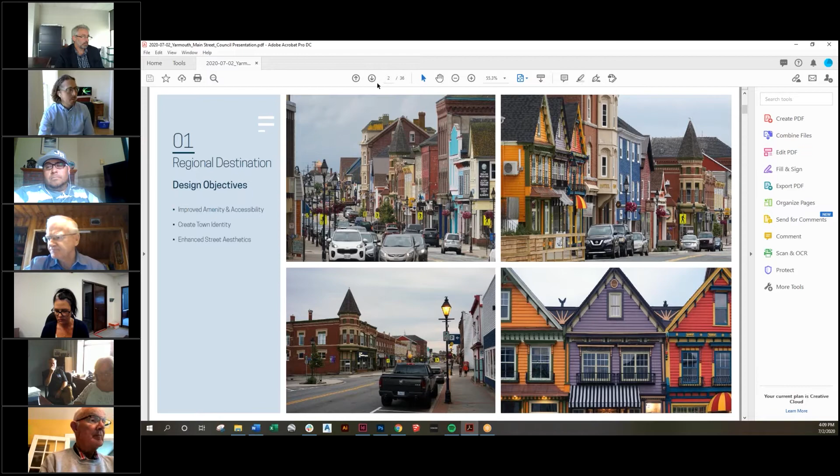To date, the streetscaping improvements started with phase one, Hawthorne Street, which converted it from a service street to a full street with sidewalk lighting, planting beds, and interlocking pavers. This work has really complemented the farmers market and created more outdoor space for vendors.

Phase two is the work our studio completed in 2017. This was a series of nine sidewalk extensions along Main Street and the adjacent corners, creating more public space in the street realm, allowing people to sit and rest, giving people planting areas and street trees, bicycle parking, and some stone features.

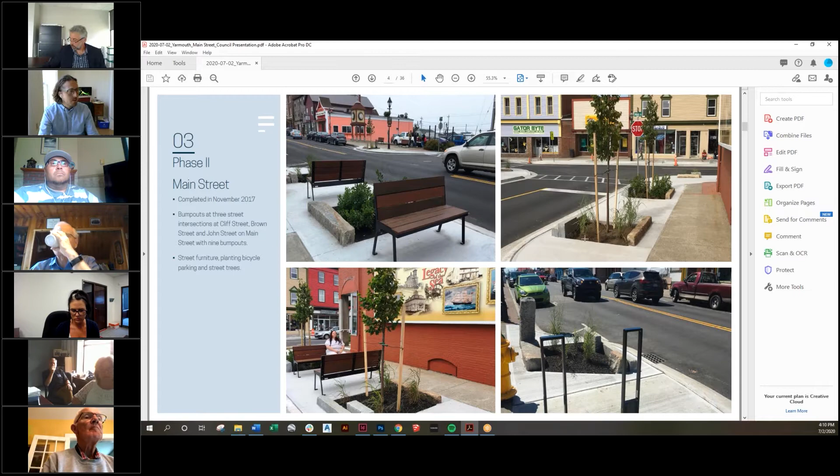So this is the phase of work we're in now, phase two extension. We're carrying the work down Main Street, past the AGNS and Alma Square, with our last bump-out area at Lovett and Collins Street.

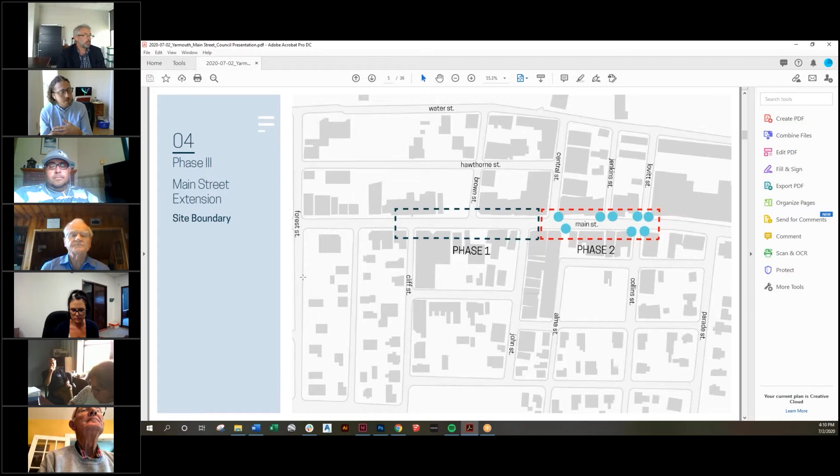As I mentioned, we were hoping, before COVID hit, to come down to Yarmouth and run a large public meeting to meet a lot of you folks, as well as residents. Lots of handshakes and greetings were in the cards, but that phase of life is over for right now, so we managed to move everything online.

We got some really great feedback. A lot of people at least looked at the site, watched the introduction video, and engaged with the survey. We wanted to get people's feelings about the work done to date, and that gave us a baseline for what to focus on in the next phase of work.

The three big takeaways were public art, more waste receptacles, and improved accessibility, meaning making sure the street was easy to use for people of all ages and abilities.

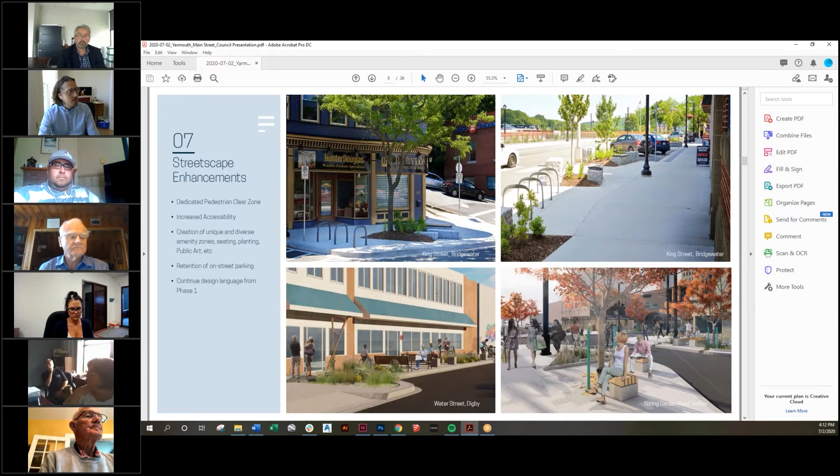One of the key things we are planning to implement for this phase of work is the use of plant material to mitigate stormwater. In our industry, we call it bioretention, meaning that rainwater that falls during a large storm is kept on site and doesn't overburden the underground pipe system. We use planting and soil media to absorb water locally and diminish the impact on the underground water system. One of the things we heard internally when we were bidding on the project was that...

Town of Yarmouth is really interested in utilizing technologies and streetscaping to showcase how progressive a group you are. This is, in our humble opinion, one of the best ways to utilize advancements in public realm design to use ecological services to really provide benefit to the city.

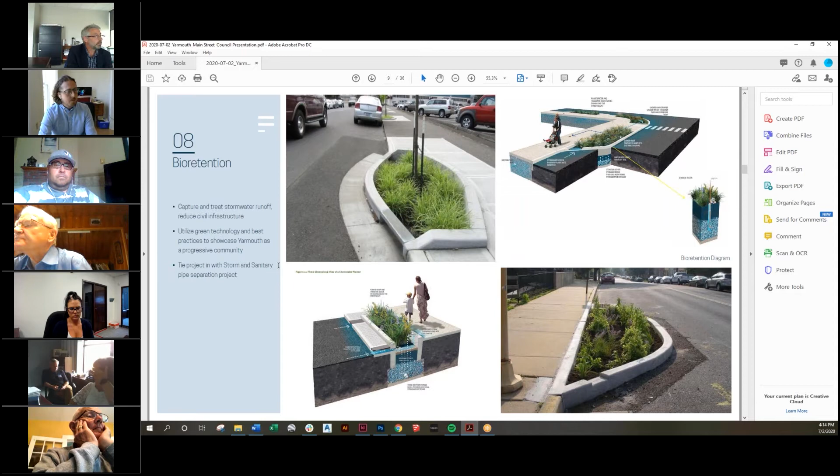Here's a little snapshot of what I'm going to walk you through now. We've really grown an interesting concept around this new streetscape phase, knowing we learned a lot in the last work we did, and we wanted to improve upon it. So I'm going to walk you through it now.

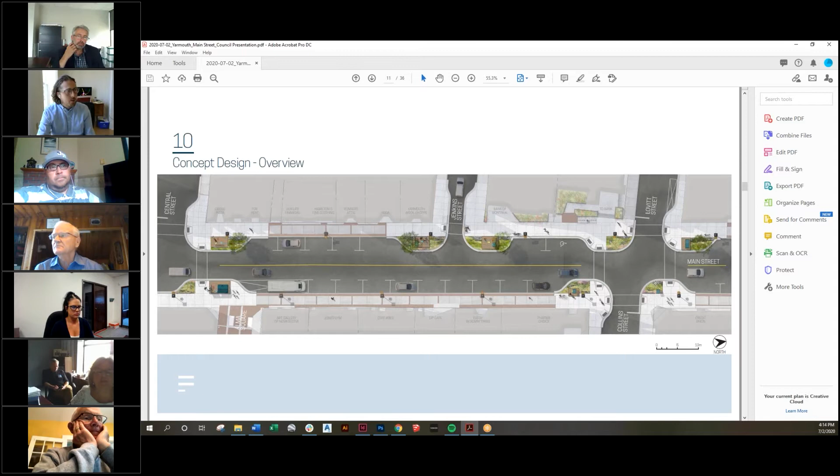We have an overview of the street from our limit of work, starting at Central Street and terminating just past Collins and Lovett. After we did the technical design for the street, these were the areas we identified could support sidewalk extensions while still retaining street parking, without causing too many conflicts for traffic movement and traffic flow in the area.

So we're going to just zoom into each area and quickly walk up the street. Right at the beginning, which is the piece that ties the work we did prior into this new work, the Central Street intersection, we have a sidewalk extension at Alma Square, which relates quite strongly to the Art Gallery of Nova Scotia, as well as acting as a transit amenity, giving people a place to wait for the bus.

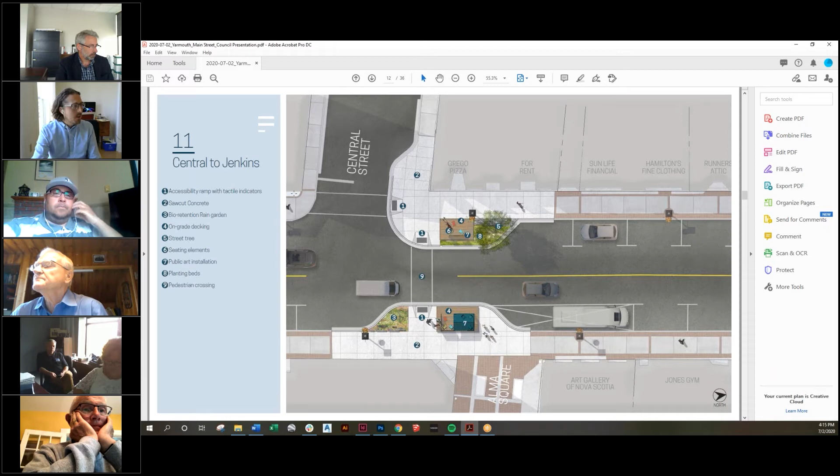I've got labels here, which you have from the presentation before. I won't go through them in great detail, but it just indicates what it is you're looking at from above, a bird's eye view, because sometimes it can be confusing.

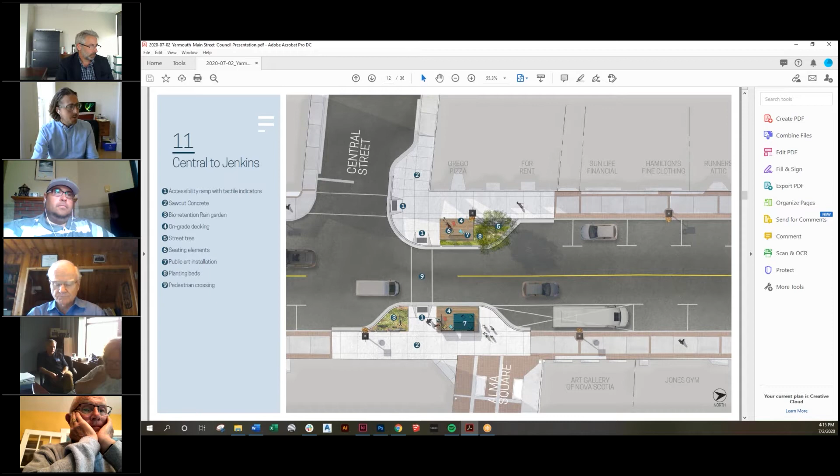As we move forward down the street, we are seeing these amenity spaces have a rhythm as we move down the street. We're taking advantage of every opportunity we can to increase plant diversity in the street, as well as to create spaces for people to linger and spend time. Up here at Central Street, this intersection hosts the most of these planting areas and seating areas, really creating a great deal of public space amenity.

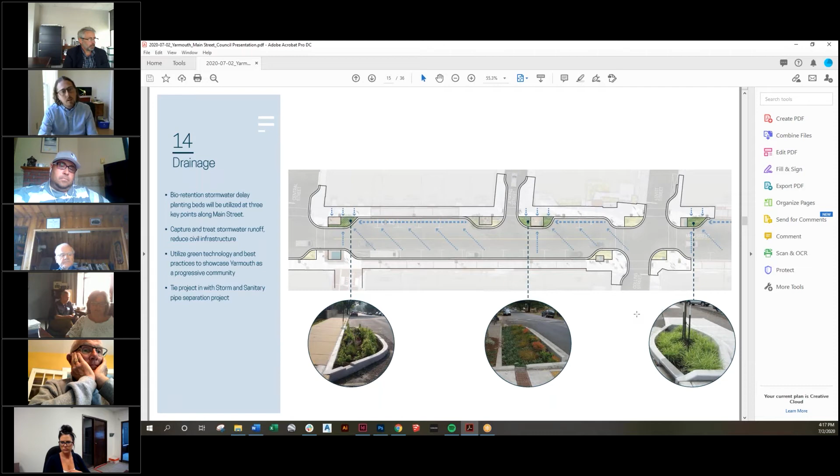As I said before, I'll just run through it again. The stormwater delay gardens capture and treat the stormwater and reduce the impact on the infrastructure. We have the opportunity now to tie our project in with a storm and sanitary pipe separation project happening along Main Street, which is a really great opportunity to regrade the whole road and focus the water where it needs to go.

When we heard about public art as a significant interest from the public engagement that we did, we got quite excited. We really liked the idea of integrating interactive public art in the streetscape. We have this concept that we want to present, which is based around the lobster car. Lobster cars, as you probably all know, are quite specific to your region and some parts of northern Maine. They're a really unique piece of architecture, and I think a lot of visitors to the area will have encountered these structures without really understanding what they are or what they achieve.

We identified that a lot of people who come to the region travel by the Yarmouth Bar to get to Cape Forchu, and in the off season they often would encounter these lobster cars brought up on shore. We thought it was a really exciting opportunity to present something with quite a regional specificity that is really unique to Yarmouth. It also speaks to the heritage of the community, its industrial past and present. We just really like the form as well, and think it's quite emblematic.

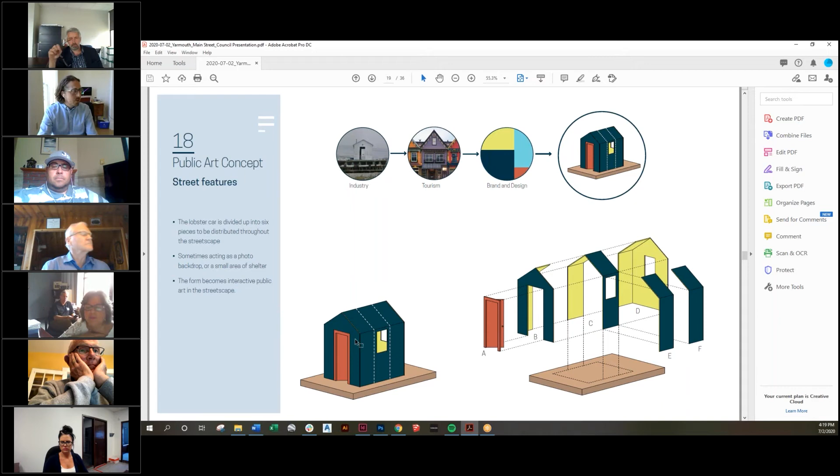We took the idea of this lobster car and we simplified its form, then we sliced it up into pieces that can be distributed throughout the sidewalk extensions on Main Street. Here's an example of how we divided it up into 6 pieces, creating a sort of interactive experience as visitors and locals travel down Main Street. They get to experience both inside and out this lobster car, piecing it together in their imagination as they move through it.

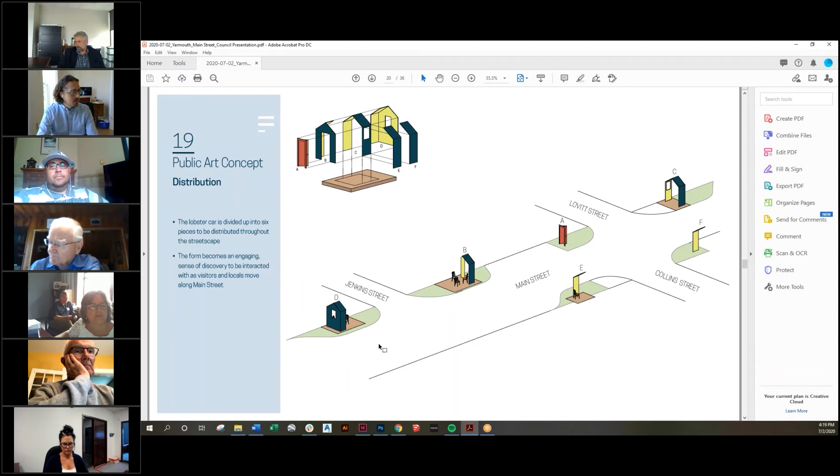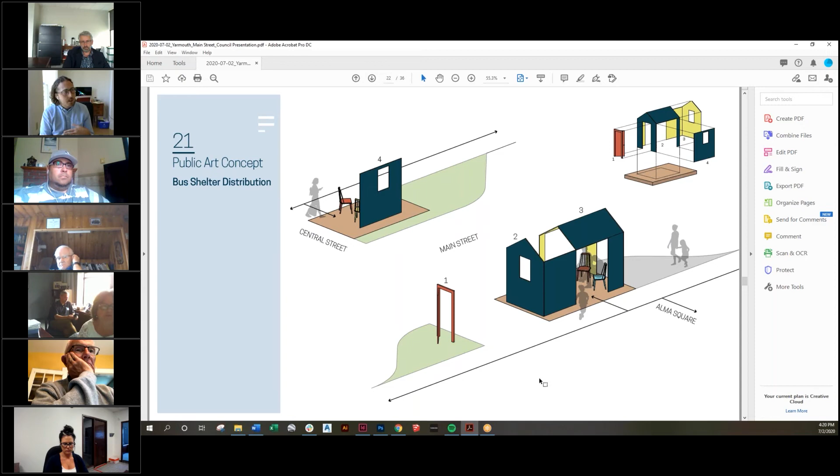We also are utilizing this aluminum panel form to our benefit, given that we have an area of transit amenity we want to contribute to the street - a place to wait for the bus. This is how we imagine the bus shelter would work. This is a really exciting opportunity to create transit amenity and give downtown Yarmouth something very unique, something very characteristically specific.

So the other edition of the public art concept, which ends up being really part of the public space amenity. In phase 2, we installed cedar benches, which you probably all know, in the bump out areas. For phase 3, we're proposing this idea of kitchen party chairs, which are quite evocative of the historic nature of Yarmouth, your invitational and hospitable nature, your colorful personality.

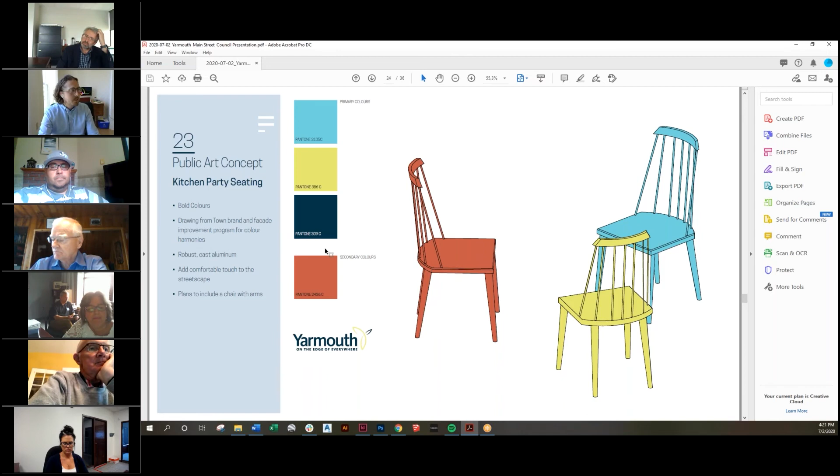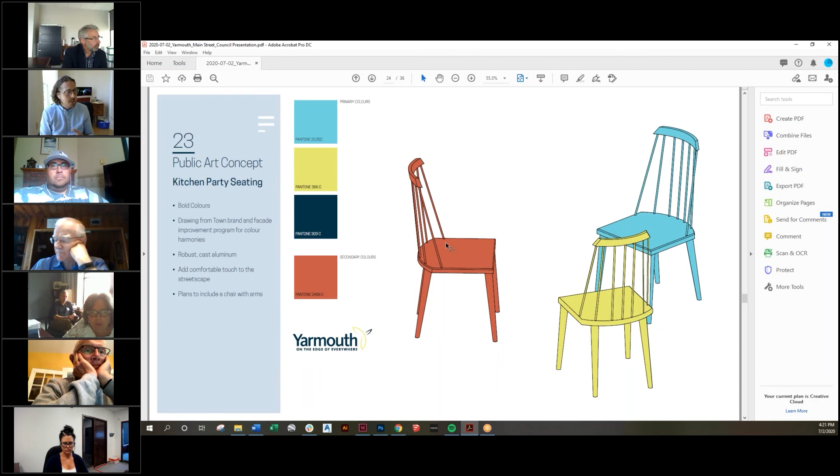Also the warm and inviting qualities of the region. So we're imagining these are cast aluminum chairs. We'd like to cast some traditional, maybe Bass River wood chairs, and do them in hardware and aluminum, then powder coat them in bright colors that pop on the streetscape, tying back into the town's brand. Beyond just a formal bench, we can really facilitate a lot of different street uses by placing these kitchen-like chairs in the streetscape. So I'd like to move forward with that.

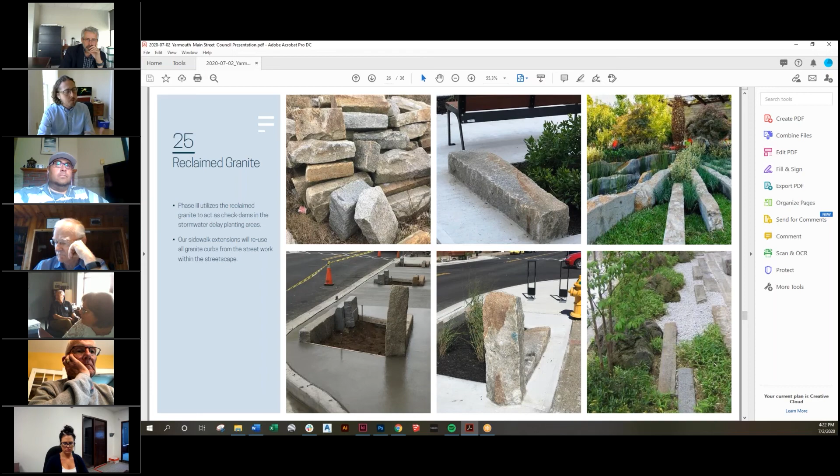And then we're going to also carry forward the reclaimed granite from the streetscape that we had used in phase 2. The idea of the rock in phase 2 is that we're making reference to the geologic formations at Cape Forchu. Given our calculations, we think we'll be able to reuse all the curbs removed by creating these sidewalk extensions, putting that granite back into the streetscape and using it as a feature to help move water into the bioretention beds.

In the planting areas, we've put together a planting palette of hardy, low maintenance grasses and perennials, so everything comes back every year, inspired by the coastal condition - salt tolerant, can handle winter snow load, and adds to the biodiversity of the streetscape. We identified two different planting palettes: one for areas heavily inundated by stormwater, and others for the more drought-like condition that will be the normal perennial planting areas.

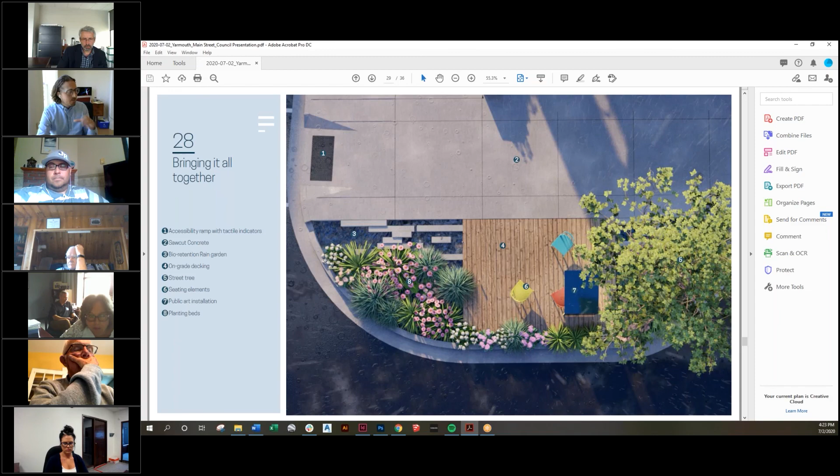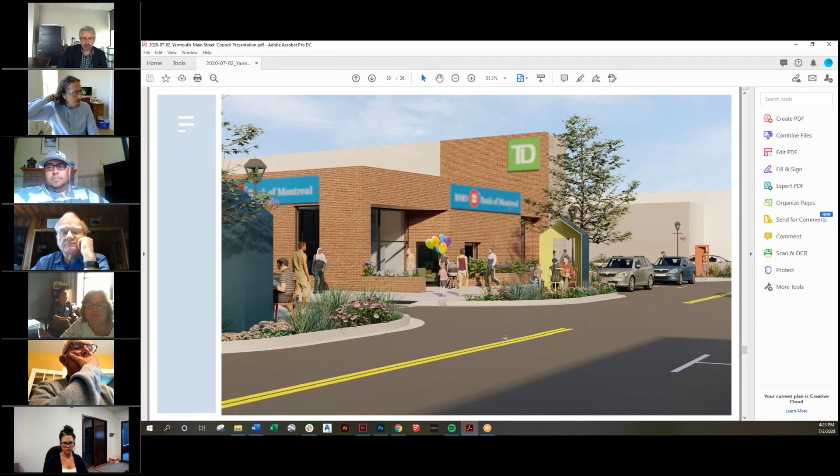And this is how we imagine it all looking in situ. So we have the newly formed concrete sidewalk. These amenity spaces will be on-grade timber decking, making reference to the wharf area, as well as being referential of the lobster crates. This is an example of a bioretention rain garden with granite inlay, reclaimed granite curbs inlay, and the kitchen party chairs. Here's a render of the corner of Jenkins, where we imagine one of the streetscape elements would be.

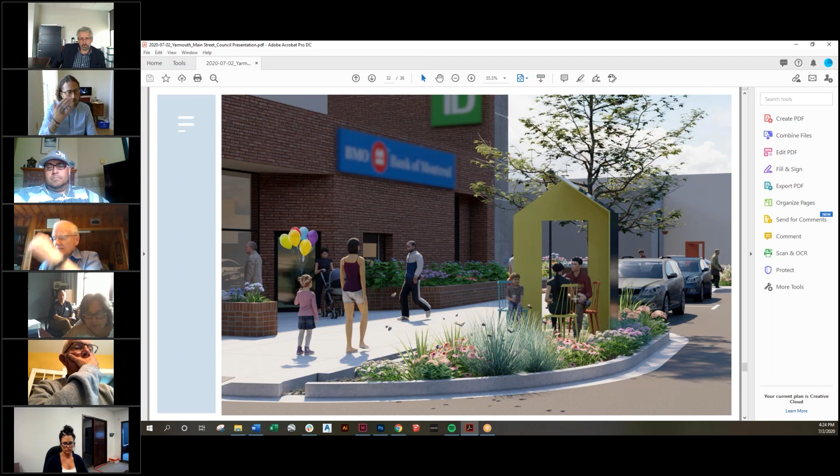We'd like to illuminate them from inside, creating features on the street at night and really allowing Main Street to be used all the time, especially in the busy summer months. We've bumped out, made the sidewalk quite a bit wider and graded everything, so accessibility is key - lots of space to move, easy grades for people in wheelchairs to maneuver crossing the street, and creating intimate seating areas by putting some sort of barrier or enclave that helps people feel comfortable, as well as being surrounded by the planting.

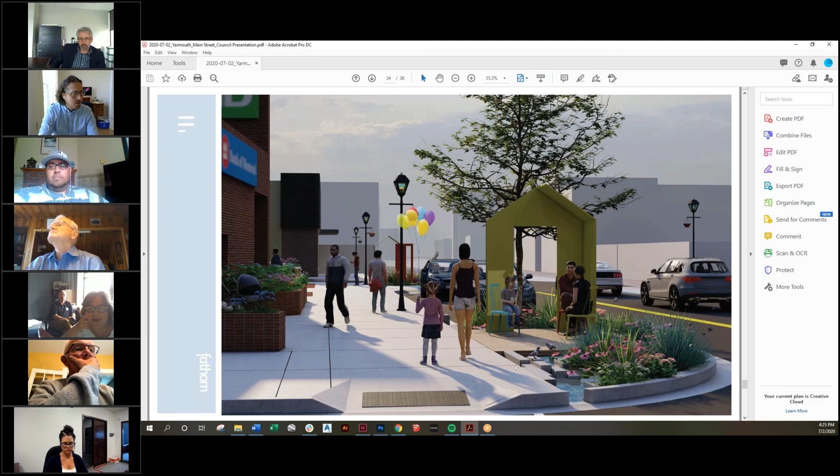And just more views of the same, to give you an example of how this could look and feel if we all agree to move forward with the public art concept. And again, at night, we're able to put LED strip lighting into these features, which really make them quite inviting at night. And that's it for us.